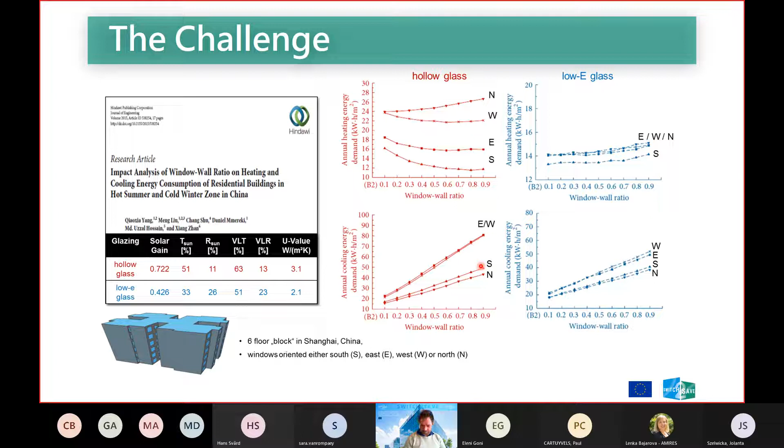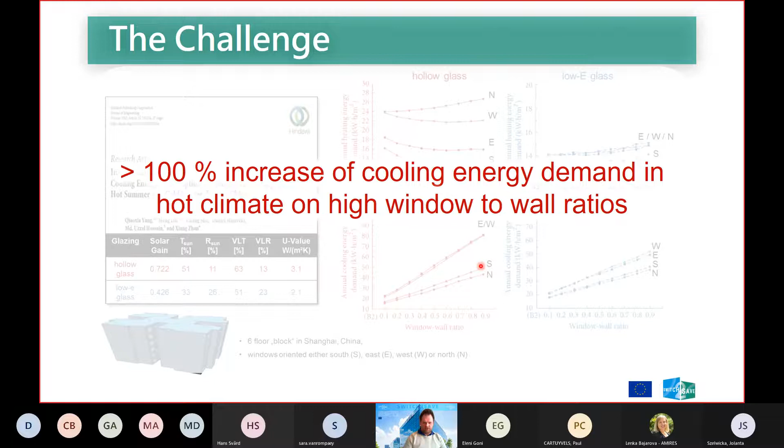The important message I want to give you for this project and from these slides is that if you have high window to wall ratios, if you have large windows with large glass facades, you will find yourself in a situation that the cooling energy demand in summer is increasing by 100% or even more. And that's even true if you use heat mirror glass, so-called low-E glass, that reflects the heat radiation. And that's something that goes also to the direction of how to deal with the climate change, not only to prevent it, but also how to deal with it. So we are addressing both aspects of this situation.

How do we want to deal with it? We want to have a switching and intelligent control of the radiation that goes through windows in a building, with two strategies for it. The first strategy is electrochromic cells. How do electrochromic cells work? You can apply a voltage just by an electrical switch. You apply a small voltage, and this small voltage will result in a change of the color of the window. In particular, it will reduce the transmission from a bleached state, here 78% transmission of visible light, to a much lower level. The window turns dark to some degree.

And then we combine these electrochromic cells with thermochromic systems. And thermochromic systems work in a different way. They switch their transmission spectrum, or how much light they let through the window, by temperature. So as soon as the surface of a window reaches a certain temperature, 60, 50 degrees Celsius, then you will find out that it turns into a reflective state, and the transmission of the infrared radiation, so the heat radiation, is significantly reduced by a factor of 2 or more.

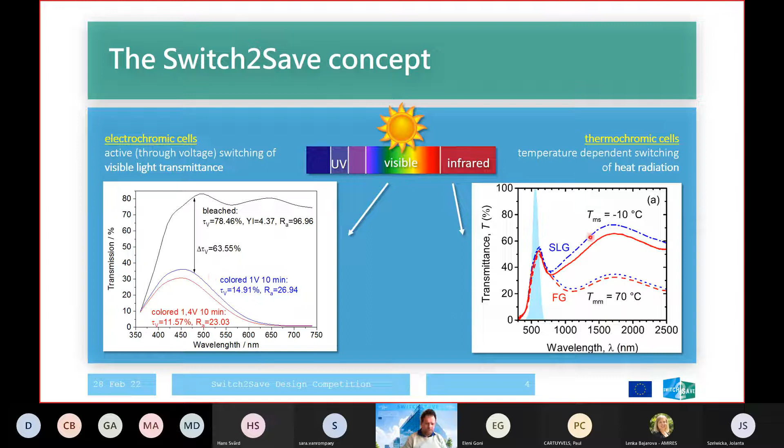So that is the idea. We combine a switching of the visible light transmittance with a switching of the infrared transmission. And what does it look like? For the electrochromic shading, we will see a little more about this in detail when we describe the technical solution. But let's give you an introduction or an idea of how it works.

You will see that the window is slowly, gradually turning dark. You will still be able to look through the window. So it is not completely black. It's not a privacy screen. You will still be able to look through it, and you will have about 10% visible light transmittance left. And that's just an illustration.

What does it look like in practice? Here you see on the left side an electrochromic window that has been made in the Switch2Save project. So it's an insulating glass unit with 1.2 times 3.6 meters. So really for large windows and for large glass facades.

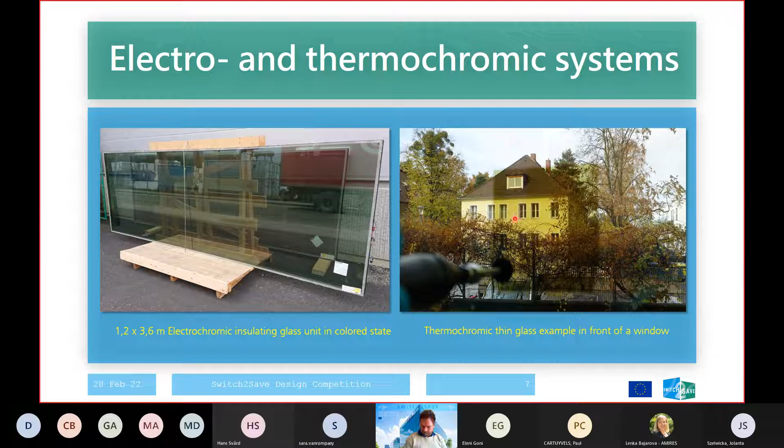And on the right side, you see an example where we just mount a thermochromic thin glass example on an existing window. The big difference is that for the thermochromic, you will not see with your eye the difference between the infrared reflective state and the infrared transmissive state, because all switching is happening in the infrared wavelength range, really controlling the heat radiation.

So what is the idea, or how do we integrate this into windows and into buildings in the Switch2Save project? We practically apply these systems on a plastic film for the electrochromic and on a rollable thin glass for the thermochromic. And that is something that will be laminated onto a glass pane. And this glass pane will form the outer pane of an insulating glass unit.

And these insulating glass units, they are universal. You can use them for glass facades. You can use them for transparent roofs even. You can use them for smart windows. So practically, the idea is that we can replace existing windows by smart windows just by replacing the window and using the new energy smart solution, I would say smart window here.

And what we also do in the Switch2Save project is we have two real live operational building demonstrators. This is an office building operated by Vasakronan in Uppsala, Sweden, and this is the second largest hospital of Greece, the General Hospital of Nikaia, which is located in Athens. So we have really two different climate conditions here. We have a northern climate, and we have the hot Southern Europe climate, and we want to demonstrate here.

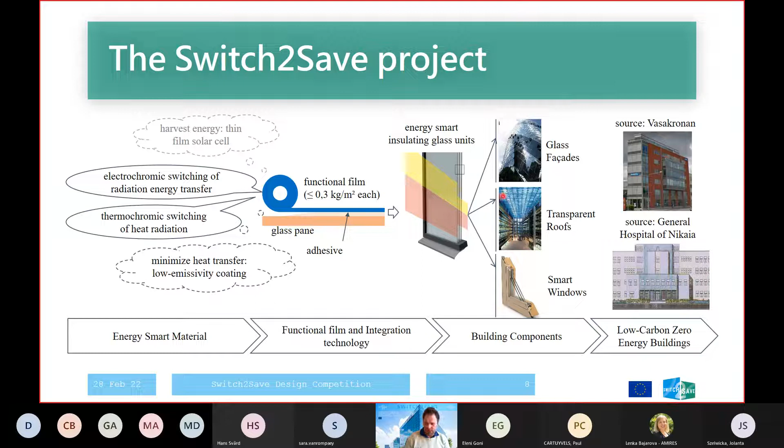And the overall strategy in the end to really come to a good energy saving is to implement intelligent switching protocols. So it is, for example, taking the weather conditions on the outside, the climate conditions, the temperature, the overall light conditions on the inside as the base for an automatic switching of the electrochromic window or the thermochromic and electrochromic combination in a roof.

So that means in winter, you will probably like to have the heat radiation from the sun going in. So then you will practically have a transmissive state. This is what you want. In summer, during the day, you want to have the heat radiation reflected. And the second story is that in winter at night, for example, you want to practically block the heat inside the room from being transmitted to the outside. And that is really the idea here, that we go where we want to save energy.

And in summer, really, thermochromic roofs can also help, because if you have no electrical contact there, no possibility to bring electricity or whatever, you can have a thermochromic roof that blocks the infrared, the heat radiation, at a certain temperature of the surface. That's the idea.

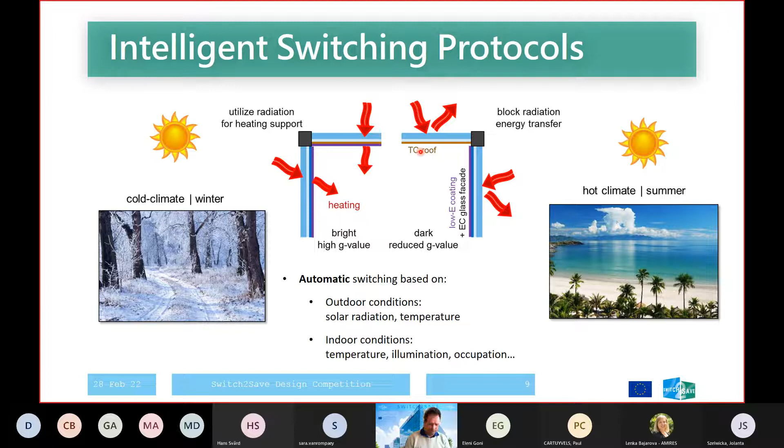And how does it serve the energy saving of the building? We have done modelings. So this is really calculations. It's not yet measured in life. This is something we do in the third and fourth year of the project. But from modeling, we learned that with a configuration that combines electrochromic and thermochromic, even the electrochromic alone helps already a lot.

And if we combine this in a building with large windows, we had an example of an office building in Athens, we can reduce the primary energy demand by more than 60%. And practically it goes mainly towards the energy demand for the cooling. So we can reduce by a factor of 2 the energy demand for the cooling, or even more. And we can even reduce the energy demand for lighting in a building in Athens.

And how does this work? Usually, if people feel uncomfortable in the building, they use the external window blind. They practically turn off the light from outside, and they switch on artificial light that they have in their offices. And that's something that we can definitely reduce, because the electrochromic windows are still transparent to a certain degree, and you can switch them to an intermediate state. So that's absolutely perfect for the illumination in the building.

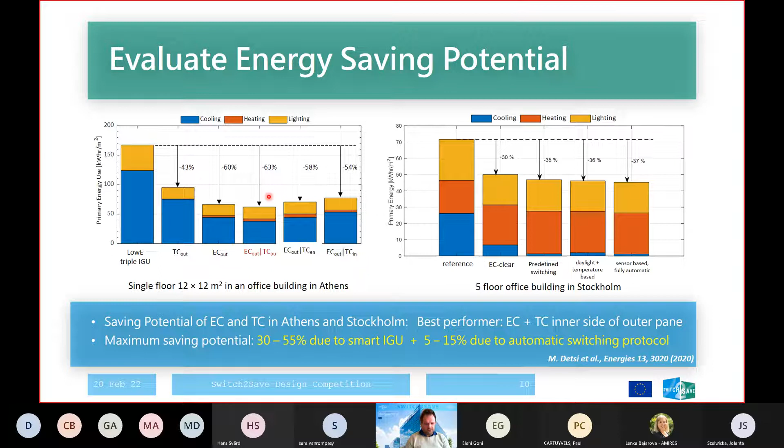That's two things that definitely we want to see with you, the architects, the upcoming architects, whether you can probably even top these numbers. Or at least show us, or show yourself, how to use the technology to maximize the impact and to create building designs that have not been possible before, just because the energy balance of these glass buildings, glass palaces, is too difficult to achieve. And I'm curious to see what design we will be able to do with this new technology.

And based on that, I want to thank you very much for your attention, just to show you all the partners in Switch2Save: the university bringing us the technology for the thermochromic, Fraunhofer Institutes with pilot production facilities and technology development, ChromoGenics for the electrochromic technology, a facade glass maker for glass facades. AMIRES is here for the project management and the public relations activities. E2ARC architects, a perfect person to ask if you have a question about the contest, and the building owners. NTUA, the National Technical University of Athens, who do all the calculations, the building simulations and the testing.

And finally, Vasakronan, office building owner in Sweden, and the hospital in Greece, Nikaia Hospital, where we will go into the children's station and into intensive care units. So really, we are speaking about a technology that you can use in a sensitive environment. Thank you very much, and I hope I was not too long.

No, you are perfect in time, John. Thank you very much for introducing the Switch2Save project in such a clear way, and for illustrating electrochromic glazing and the intelligent switching protocols.

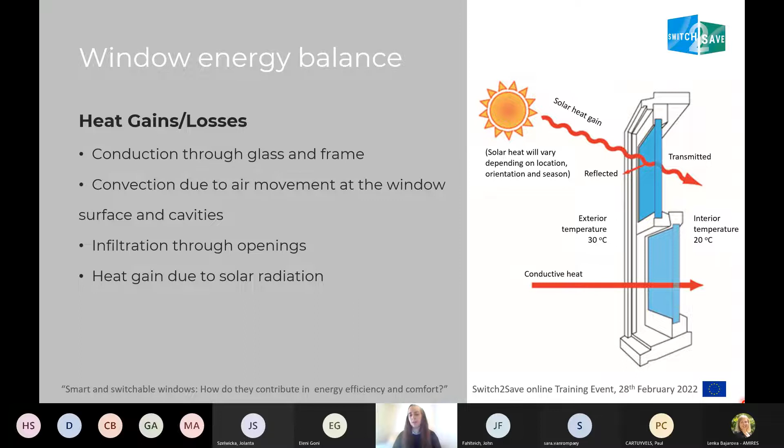And finally, as we all know, windows are a source of heat gain for the space due to solar radiation, which can vary depending on the location of the building, the orientation, and the season. An important metric for window systems is the U value, which expresses the insulation ability of a window system. The U value is defined as the rate of heat transfer divided by the temperature difference, and therefore a lower U value corresponds to lower heat transfer and higher insulation.

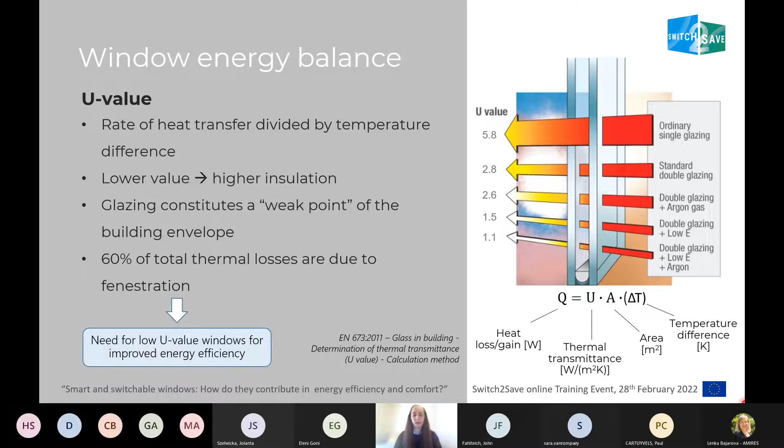The U value is highly dependent on the configuration of the window system. So for example, for an ordinary single glazing, the U value is quite high at approximately 5.8, while for a double glazing that has low-E coating and argon filling, the U value is much lower at approximately 1.1. Despite their various benefits, windows tend to be a weak point of the building envelope, as they are responsible for approximately 60% of the total thermal loss. And therefore, there is a need for windows that have lower U values to improve energy efficiency.

Another important metric is the solar factor, or the G value, which is defined as the sum of the direct solar transmittance through the window, as well as the secondary heat transfer, which is the heat that is absorbed by the window and then re-emitted towards the interior. The G value is essentially the percentage of the incident solar heat gain on the window that is then converted to heat gain in the interior space. So for a colder climate or during the winter months, a higher G value is desirable to reduce the building's heating needs, while for a warmer climate or during the summer months, a lower G value is preferable to reduce the building's needs in cooling.

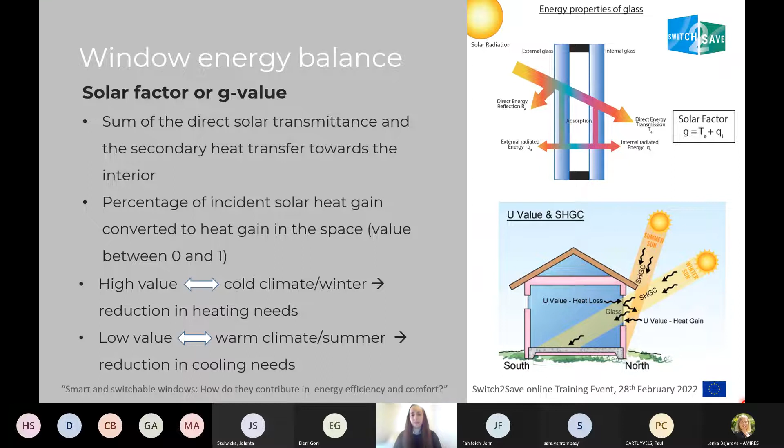The visible light transmittance is also an important metric. It expresses the percentage of visible light that is transmitted through the window. And obviously, it is important to have a high value for the visible light transmittance to ensure visual comfort for the occupants of the building and to also reduce the building's needs for artificial lighting.

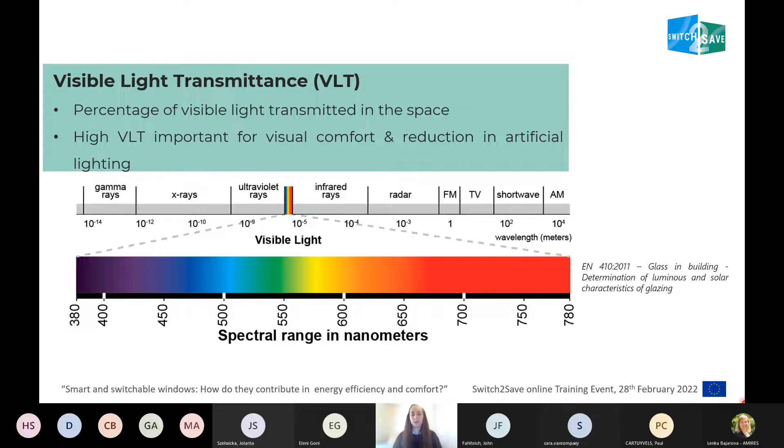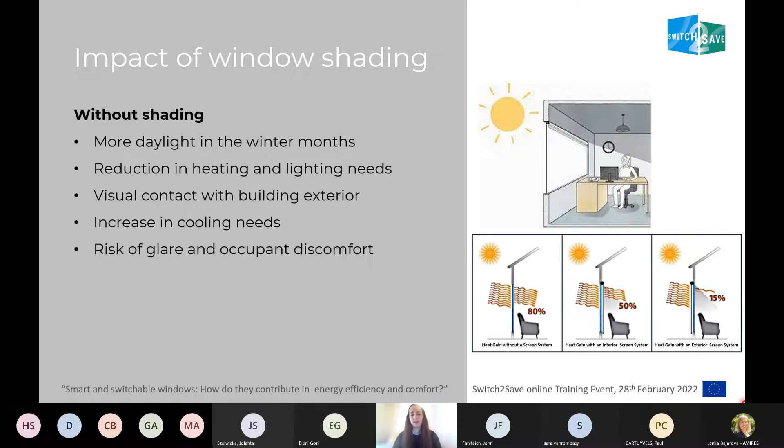Now, regarding the impact of shading. In the absence of shading, windows allow more daylight to enter the space. This is desirable especially during the winter months to reduce the building's needs for heating and lighting. And at the same time, it increases occupant comfort since they are allowed to have visual contact with the environment of the building. However, overheating of the space can occur during the summer months, which leads to an increase in cooling needs, and there is also a risk of glare that causes discomfort.

Interior or exterior shading systems are able to protect the space from overheating due to solar radiation, improving the building's energy efficiency in terms of cooling. And shading also offers protection from glare and UV radiation, and it enhances privacy. However, a shading system might obstruct the occupants' view to the outside, which might create a feeling of being closed in to the occupants.

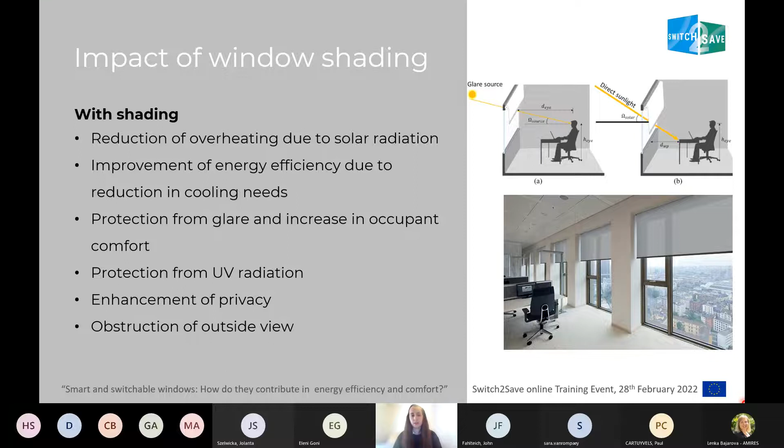Regarding the total fenestration area and dimensions, an important metric is the window-to-wall ratio, which is defined as the ratio of the total window area divided by the exterior wall area of the building, taking into account all the exterior walls. And in this picture here, you can see the same building depicted for 3 different window-to-wall ratios, ranging from 25 to 50 and 75%.

Another important aspect for windows is the ratio of height to width. Here, a higher value, which means that the height of the window is greater than the width, allows greater solar penetration in the space, but limits view to the outside, while a lower value, where the width of the window is greater than its height, allows a more uniform illumination of the space.

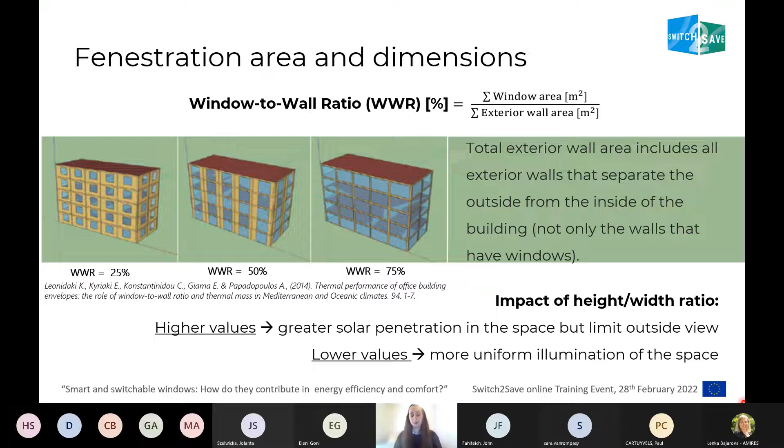Apart from energy efficiency, another important factor is comfort. And to better understand the impact of windows, it is important to find a way to quantify comfort, which is divided into thermal and visual comfort.

Thermal comfort is defined as a state of mind in which a person is satisfied with the thermal environment and desires no further change. This can be affected by many parameters, such as the air temperature and the airspeed, the humidity of the space, and the clothing and the metabolic rate of the occupants, as well as the radiant temperature.

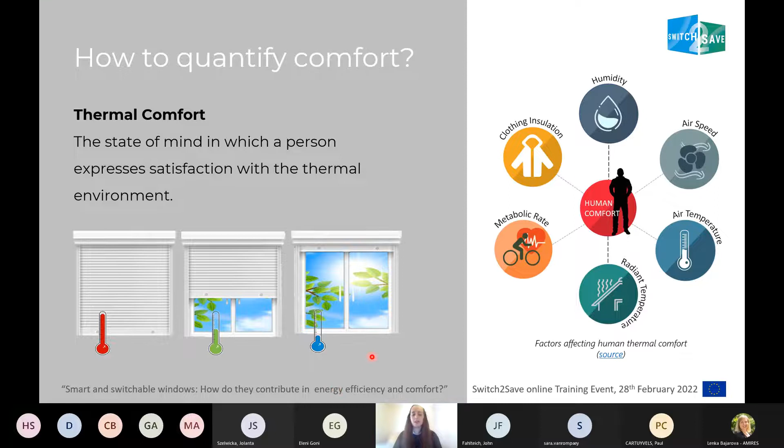And window operation is also greatly affected by occupant comfort. For example, during the summer, the occupants might use shading systems to keep their space cooler, while during the winter, they will tend to leave the windows unshaded to increase heat gain in the space.

A popular model to quantify thermal comfort was introduced by Fanger and is based on the heat balance of the human body. This model can be used to calculate two important indices, the first being the predicted mean vote, which is the prediction of the mean vote of a large group of persons on a 7-point sensational scale that ranges from -3 to 3. -3 refers to a space that is too cold, while 3 refers to a space that is too hot, and 0 refers to a neutral thermal sensation.

The PMV index can be used to calculate another index that is called the predicted percentage dissatisfied, or PPD, which is pretty much the predicted percentage of people in the space that are going to be dissatisfied with the thermal environment. And in this figure here, we can see the correlation between the PMV and the PPD indices. And it is interesting to note that even for a neutral thermal sensation with a PMV value of 0, there is still always 5% of people that are thermally dissatisfied.

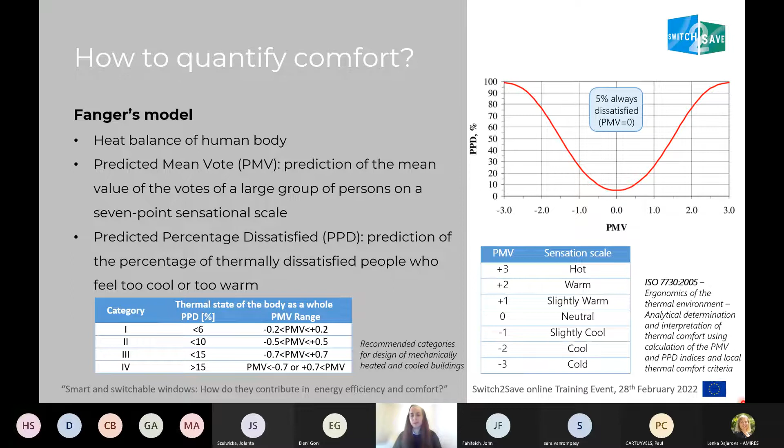Another aspect of comfort is visual comfort, which refers to whether there is an adequate level and quality of illumination for visual tasks in the space. The international standards usually set specific requirements according to the space use. And for building design, an important aspect is daylight harvesting. Daylight harvesting decreases the demand for artificial lighting and is especially useful in buildings that are mainly used during the daytime, such as non-residential buildings.

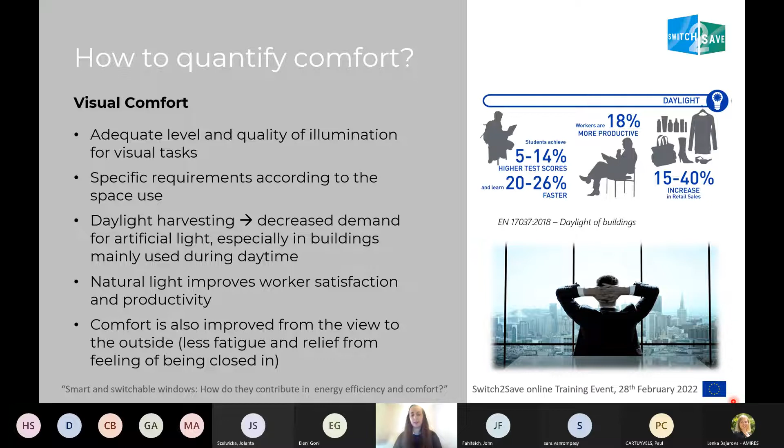It has been proven that natural light is much more preferable compared to artificial light, since it improves worker satisfaction and productivity. And also, occupant comfort is improved by allowing the occupants to have a view to the outside, which reduces their fatigue and relieves them from feeling like they are being closed in.

Visual comfort also includes the avoidance of glare, which is a negative sensation that can be caused by bright areas that have a sufficiently greater luminance than the luminance to which the eyes are adapted. It can be caused by direct sunlight through a window, as you can see in the figure here, or generally by the luminance difference between a bright area and the darker task area.

Glare can result in annoyance, discomfort, or loss in visual performance and visibility, and it can be quantified by a number of different indices, such as the daylight glare index. This index is calculated according to the luminance of the glare source, which in this case is the window, the background illuminance, which is the illuminance of the area surrounding the window, as well as the relative position and orientation of the occupants of the space compared to the position of the windows.

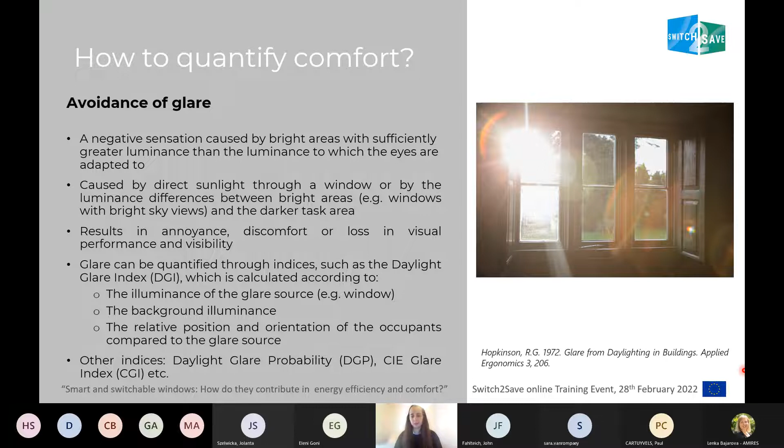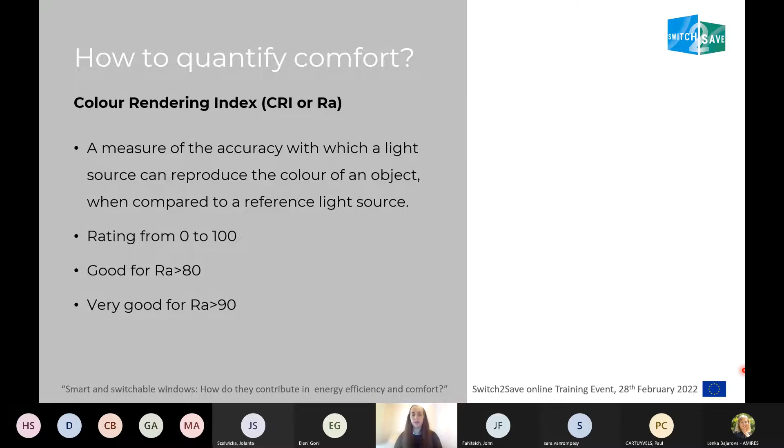Visual comfort is also affected by the color rendering index, which is a measure of the accuracy with which a light source can reproduce the color of an object when compared to a reference light source. For example, a colored window will affect the perception of the color of the objects that are on the outside. In this case, a window that has a blue tint will make the objects behind the window appear bluer than what they actually are. For windows, a color rendering of 80 or higher is considered good, and a value of 90 or higher is considered ideal.

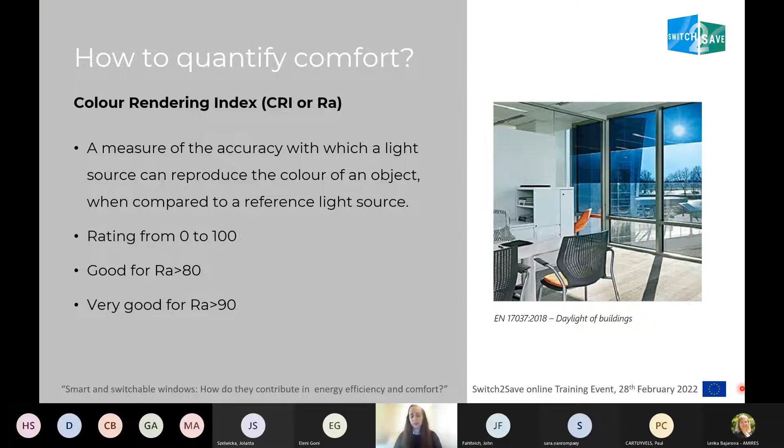There are many tools that we use to calculate energy efficiency and comfort. For example, EnergyPlus is a free-of-cost software that can be used for whole building energy simulation. It has many capabilities such as combined heat and mass transfer modeling, and illuminance and glare calculations, and can also include an interface for co-simulation with other software.

Another useful tool is WINDOW, which includes an international glazing database of commercial glazing, as well as complex glazing and shading devices. And this software can be used to create and then import glazing systems into other software or to calculate their thermal and optical properties.

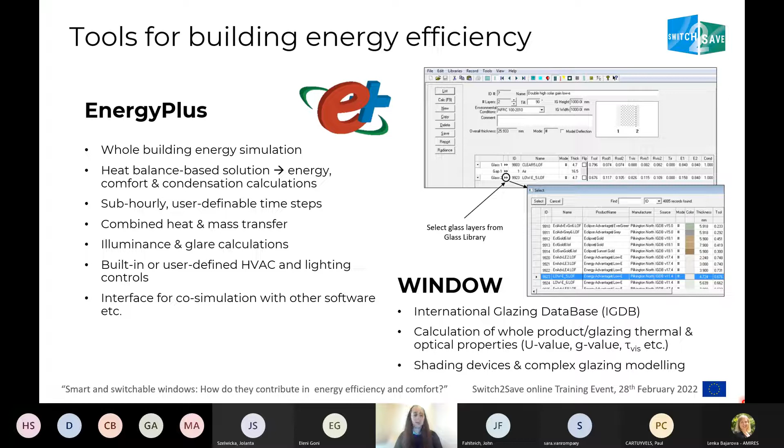For example, for a whole building energy simulation, the appropriate window systems can be first created in WINDOW and then imported into EnergyPlus for a whole year energy simulation. And this way, we are able to calculate the building's energy needs as well as the appropriate comfort indices, and we're able to improve and eventually optimize energy efficiency as well as comfort. And this is the end of the first part of my presentation.

Thank you, Michaela. This was very clear to understand how this switchable glazing works and what the effects are. Now I would like to invite Alexander with his presentation. I introduced him shortly as an expert in electrochromic systems in Chromogenics, partner of the project. He is an experienced consultant with a demonstrated history of working in the building materials industry, skilled in electrochromics and other switchable glass technologies, as we are developing in the Switch2Save project. I give you the floor, Alexander.

Good morning and hello. My name is Alexander Kraft. I'm a member of the Chromogenics R&D team and the work package leader at the Switch2Save project. I will talk a little bit about dynamic sun protection glass.

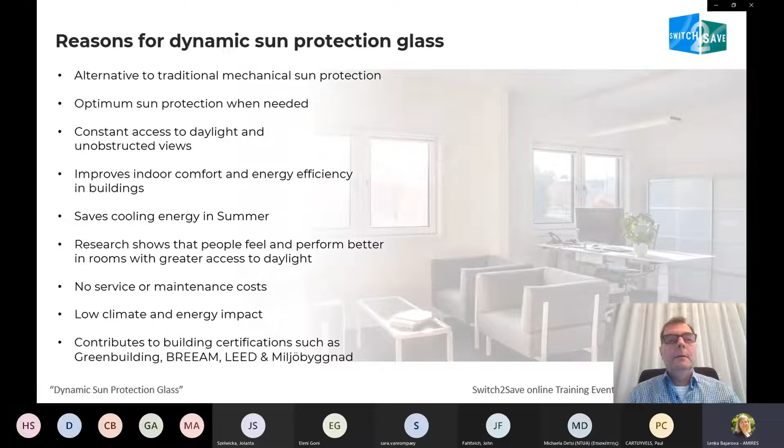What are the reasons for using dynamic sun protection glass? This is an alternative to traditional mechanical sun protection solutions. You have optimum sun protection when needed. You have constant access to daylight and an unobstructed view from the inside of the building to the outside. It improves indoor comfort and energy efficiency in buildings and saves cooling energy in summer.

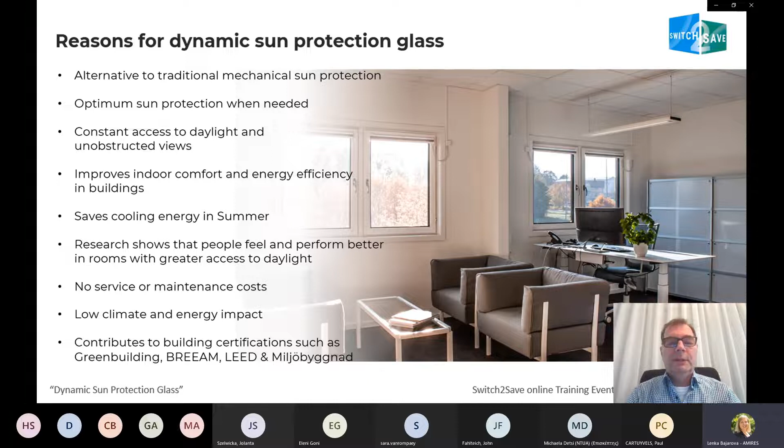Research shows that people feel and perform better in rooms with greater access to daylight. You have no service or maintenance cost compared to external shading solutions and the low climate and energy impact. The use of dynamic sun protection glass also contributes to building certifications such as Green Building, BREEAM, LEED, and the Swedish Miljöbyggnad.

What technologies can be used for dynamic sun protection glass? We have two fields of solutions, the active field and the passive field. Starting with the active technologies, the dynamic light transmittance can directly be influenced by the user. Technologies which are among the active technologies are electrochromic, liquid crystal technologies, and so-called suspended particle technologies. We at Chromogenics and in the Switch2Save project focus on electrochromic technology.

Here, a switching of the light transmittance can be done by applying low DC voltages in the range of 1 to 3 volts. It is a slow switching, which takes several minutes. Energy is only necessary for switching, and each intermediate state between the maximum and minimum light transmittance can be adjusted.

Contrary to this, liquid crystal technologies and suspended particle technologies are switched by the application of higher voltages. These are AC voltages between around 60 to 110 volts. It is a fast switching in seconds, but energy is necessary to maintain one of the transmittance states. Usually you have only two states, on and off, and without a voltage you have either the milky or a dark state, and with voltage you have a clear state or the state with a high visible light transmittance.

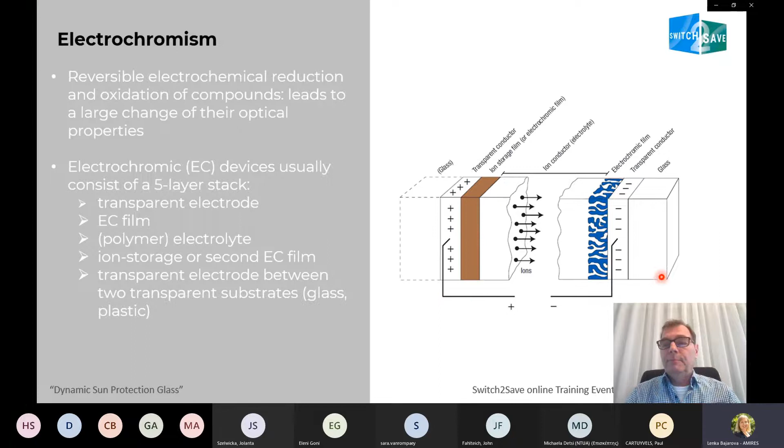To make this usable in practice in a window, usually a 5-layer stack is constructed. This is a transparent electrode, a first electrochromic film, a polymer electrolyte, a second electrochromic film or ion storage film, and a second transparent electrode. The low DC voltage is applied between the transparent electrodes, and this 5-layer stack is packed between 2 transparent substrates, mostly glass, but transparent polymers can also be used.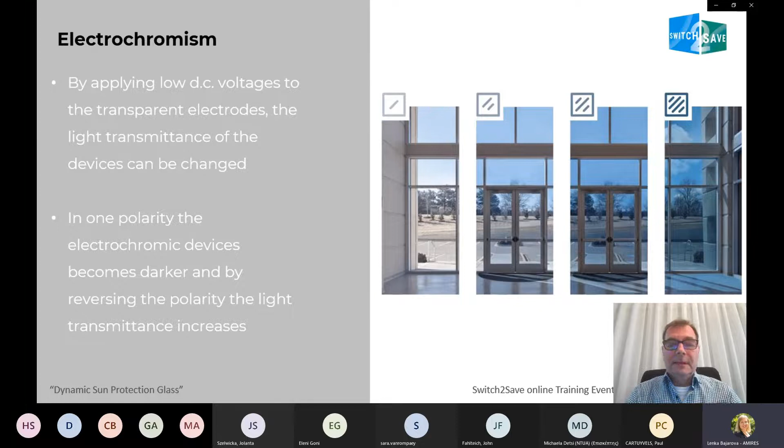Shortly, a few words about the company Chromogenics. We are a Swedish company. The company was founded in Uppsala in 2003. We are proud of our innovation leadership for 20 years. The research we bring to real products on the market is from the Ångström Laboratory of Uppsala University. We focus on smart glass, solar control, and electrochromic material. And our company is listed on the Nasdaq First North Growth Market in Stockholm.

Chromogenics' product is called ConverLight. It is a lightweight electrochromic foil. So the 5-layer stack is placed between 2 thin polyester films, each about 100 micrometers thick. And this is very advantageous because this can be produced in a roll-to-roll technology with very low cost and high-speed manufacturing. In addition, such a lightweight, thin electrochromic foil can be transported anywhere in the world at low cost because you do not have to transport heavy glass.

In the end, this foil has to be laminated between 2 glass panes to make it durable, and the end product is a laminated glass or an insulating glass unit with 2, 3, or 4 glass panes and this laminated glass. An electronic control unit automatically regulates the tone of the film and the solar transmission, for example, by connecting to a sensor network. Also, a fully self-sustaining dynamic glass powered by solar cells, which are integrated in the window frame, is possible and is a product of Chromogenics.

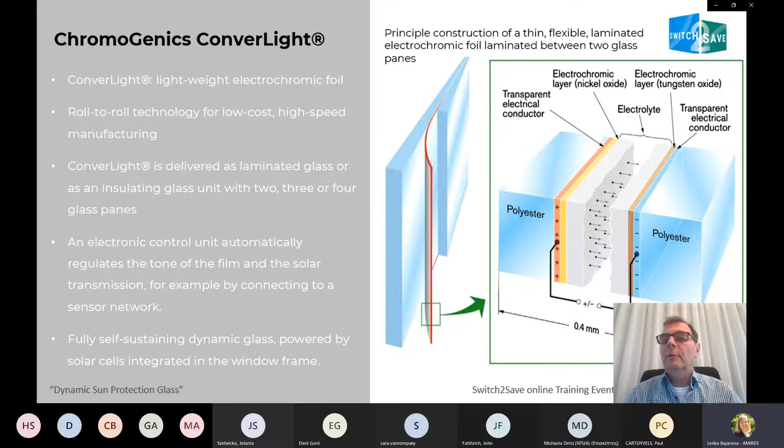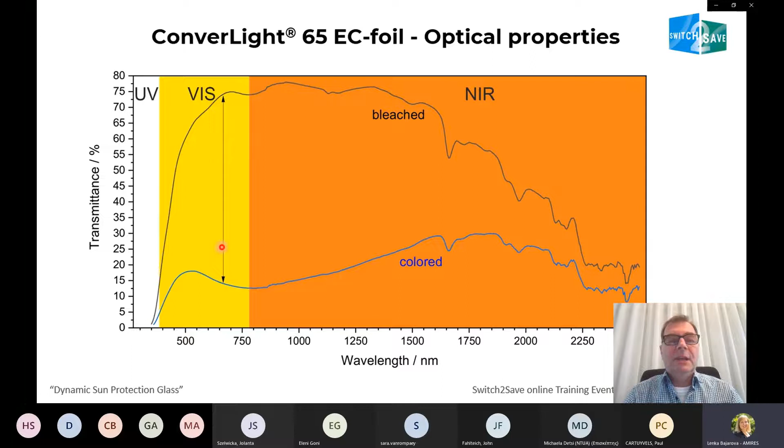Here you see the optical properties of the ConverLight 65 EC foil. This is the transmittance versus wavelength. The white part here is the UV light, ultraviolet. The yellow is the visible light, so this is what we can see. And the near infrared, the orange part, is the heat radiation. We have a high light transmittance in the bleached state and a much lower light transmittance in the colored state, and we can adjust all light transmittances in between.

In the next slide, you see a few data of this product as a single glazed, double glazed, or triple glazed product. You can see that the light transmittance changes between 66 and 17% if a single glazed product is used. In a modern triple glazing IGU, the light transmittance can be changed between 54 and 14%. We have a very good color rendering index. And of course, the U value goes massively down if you use double or even triple pane windows.

Here are the colors. The color in transmission in the clear state is slightly yellowish brownish. The color in the dark state is neutral gray. And the colors in reflection, in the clear state and in the dark state, are also more brownish. This is one of the disadvantages of the current state of the art of Chromogenics glass, because this yellow brownish color is not very favorable. Many customers do not like this color.

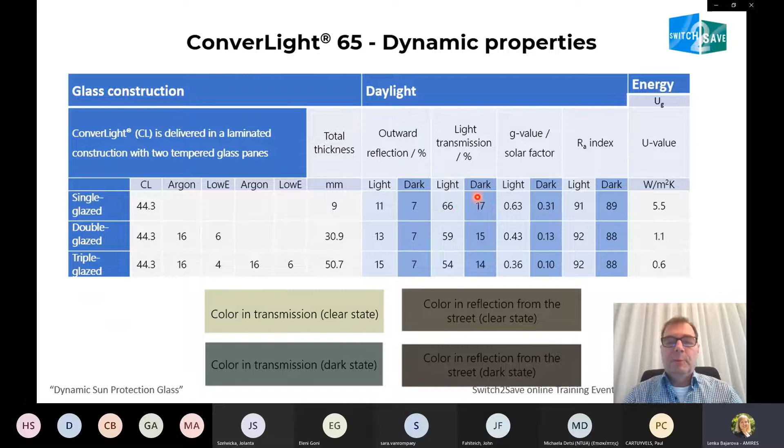So one task of the Switch2Save project is to get rid of this yellow brownish color. In addition, we want to have a higher light transmittance in the bleached state, more than 75%, and a lower light transmittance in the dark state, less than 10%. This would massively improve the properties, the performance of the glass, and also the user acceptance.

These are two examples of our glass. This is the single glass. On the left side, you see the bleaching of the glass. And on the right side, you will see the coloring of the glass. This is faster than in reality. As I already said, it takes a few minutes, and here it only takes a few seconds. But of course, in such a presentation, we cannot wait minutes for the glass to change light transmittance. Yeah, these are real objects.

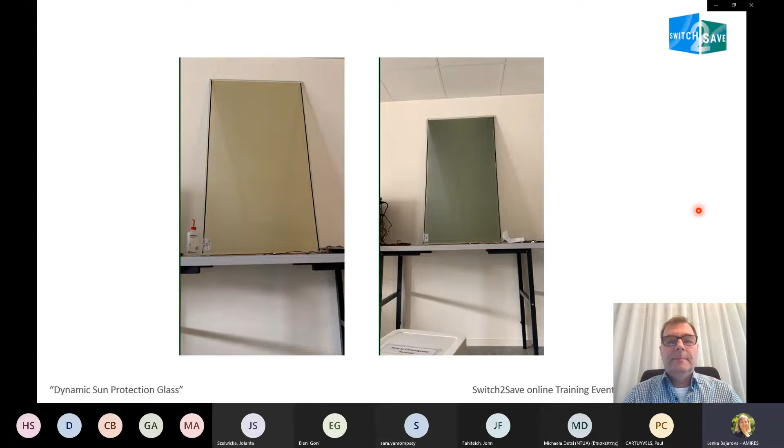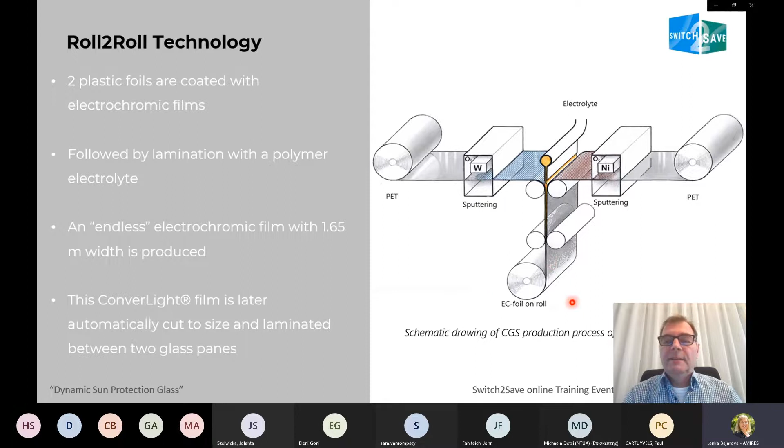And here, shortly, a few words on the production process. As I already said, we have a roll-to-roll technology. Two plastic foils are coated with electrochromic films, tungsten oxide and nickel oxide, and then laminated together with a polymer electrolyte, and then you have the EC foil on rolls. The end product is the ConverLight dynamic electrochromic IGU with 2 to 4 glass panes.

We have a freedom of design, so not only rectangular shapes are possible, but also circular or any shape, triangular, curved. Maximum dimensions which can be produced at the moment are 1.5 meters times 4.4 meters. Maybe even 5 meters is possible here. And everything is automatically controlled via a control system.

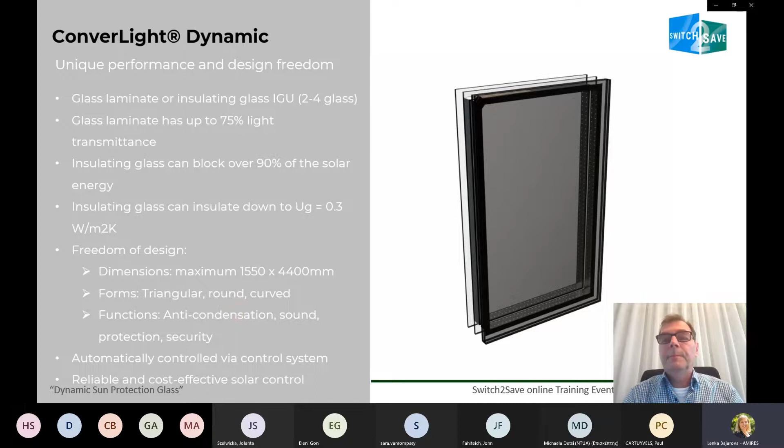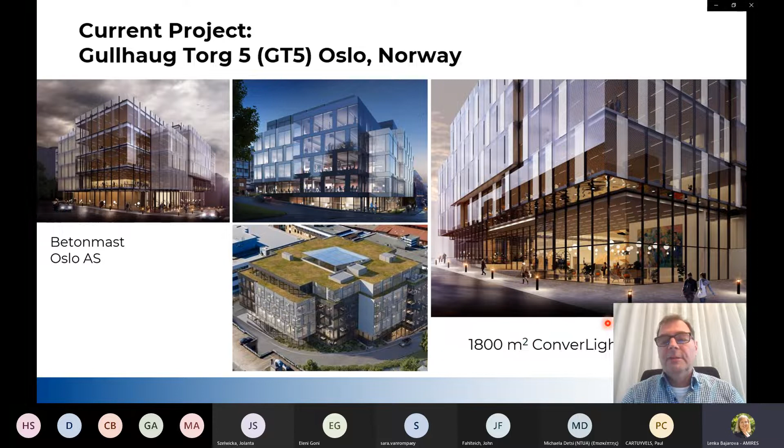This is the roof of a school in Göteborg in Sweden, 520 square meters of ConverLight glass. And this is the project we are equipping at the moment with the electrochromic glass. It's the GT5 project in Oslo in Norway. So here everything will be equipped with electrochromic glass, still with the brownish colored glass. This is the largest project we had so far. It's 1,800 square meters of ConverLight dynamic sun protection glass.

Only a few words on switching protocols for the electrochromic films which are possible. One possibility is, of course, manual control according to the user. So each user in his office room or in his apartment can manually switch the device as he wants. We can have a predefined control according to a specific schedule. Maybe in the night, in the early morning, and in the evening, we have clear glass, and over the day, we have dark glass.

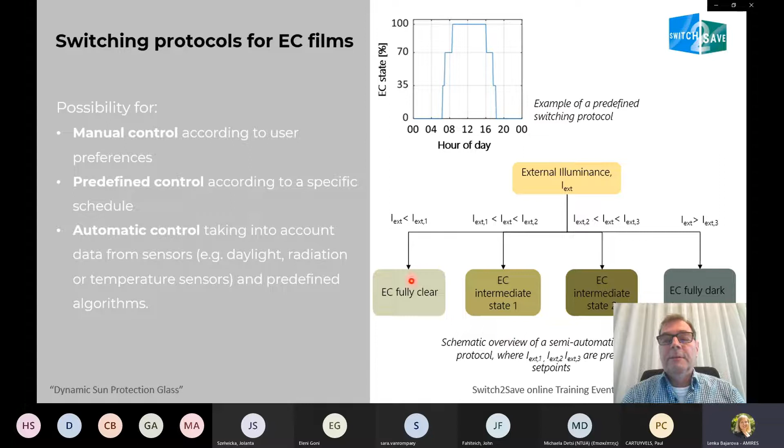And the most advanced is automatic control, taking into account data from sensors, daylight sensors, light intensity sensors, radiation or temperature sensors, and using a predefined algorithm to change the light transmittance of the glass. Here you can see, with what I already said, that different states are possible. This was my part for the Switch2Save project, and I want to thank you.

Thank you, Alexander, for the very interesting introduction to electrochromic glazing, the glazing that you are producing with your company Chromogenics, partner in the project. Also, the examples were very interesting, and important for us architects is to see and to know and to understand how it looks, this glazing that changes color. Because for the design projects, that is also very important.

Now we come to the moment of launching the architectural design competition. I did not yet introduce myself. My name is Sarah van Rompaey. I'm an architect. Sarah, excuse me. There is a presentation left from NTUA, the second part. Oh, sorry, yes. So it's Michaela again then. Yes. And this part is much shorter than the previous one.

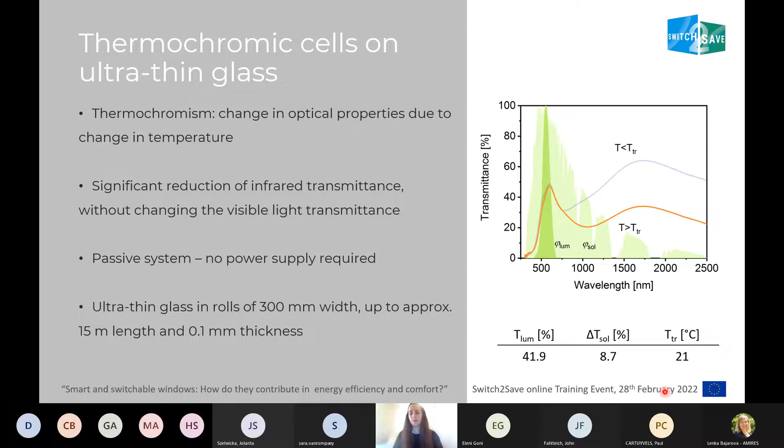In this figure you can see the transmittance of a thermochromic sample that has been developed for various wavelengths, for temperatures under the transition temperature, which in this case is 21 degrees, and for temperatures higher than the transition temperature. This darker green area corresponds to the visible spectrum, the light that we can see. So switching of the thermochromic layer leads to a significant reduction in the infrared transmittance, while the transmittance in the visible spectrum is not affected. Here you can also see some characteristic optical properties of the developed thermochromic samples.

In this figure, again, you can see how the exterior environment can be seen through a thermochromic sample compared to a normal window. And here you can see a visual representation of the color of the thermochromic samples in transmission, as seen from the interior of the building, and in reflection, as seen from the outside of the building. It should be noted that because the change in the sample's properties in the visible spectrum is not significant when it is switched from the cold to the higher temperature state, these colors also don't change significantly.

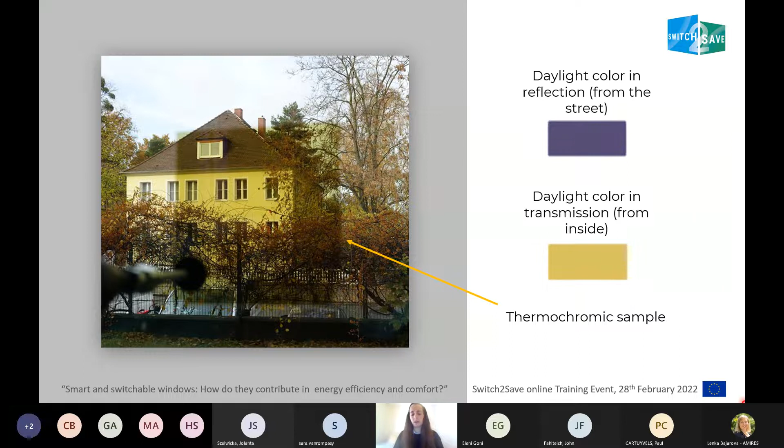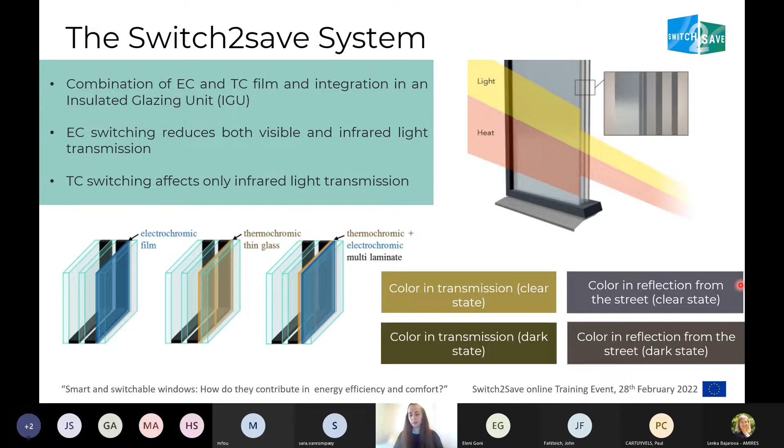The aim of the Switch2Save project is to combine in the same insulated glazing unit both an electrochromic and a thermochromic film. In this configuration, the electrochromic film will be responsible for reducing the transmittance in both the infrared and the visible spectrum, while the thermochromic film will only further reduce the infrared heat transfer. Here you can see a visual representation of the system that we aim to create, and a representation of the color of a combined electrochromic and thermochromic system. Here is the color as seen from the building interior for the clear state of both films and for the dark state of both films. And here is the color as seen from the outside, again for the clear state and for the dark state.

Now, two indicative case studies that were conducted in the frame of the Switch2Save project will be shortly presented. The first one refers to the neonatal intensive care unit of the General Hospital of Nikaia in Athens. Here you can see the building model that we created for the clinic. And in this study, we examined various control strategies for the electrochromic film of a combined electrochromic and thermochromic system.

And we calculated the energy needs of the clinic for heating, cooling, and lighting for the different control strategies and compared them to the current state of the clinic. It has double windows with interior shades and exterior awnings. And the results showed that there can be a reduction of approximately 11% in primary energy use using the Switch2Save insulated glazing units. And there can also be an additional reduction up to 1.8% when implementing optimized switching protocols.

At the same time, the visual comfort for the people in the clinic is significantly improved since more daylight is allowed in the space, and the people are now able to have a view to the outside, which was previously obstructed by both the interior shades and the exterior awnings.

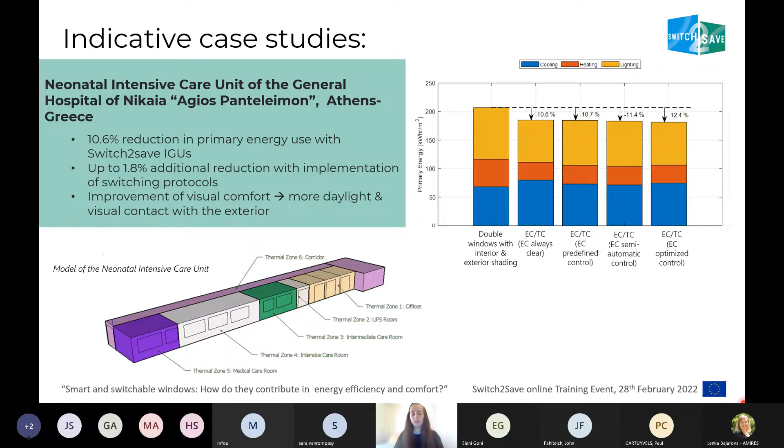And the second and final case study refers to the Business College of Athens in Greece. This is an office and educational building that has a fully glazed south facade that is shaded by exterior overhangs as well as interior shades. And the study showed that replacing the current double windows with triple electrochromic windows leads to a significant reduction between 21 and 23% in primary energy use, depending on the control strategy. And at the same time, visual comfort is also improved.

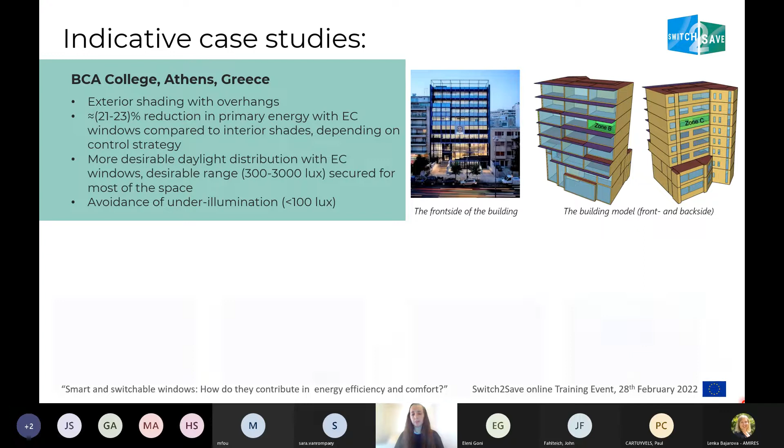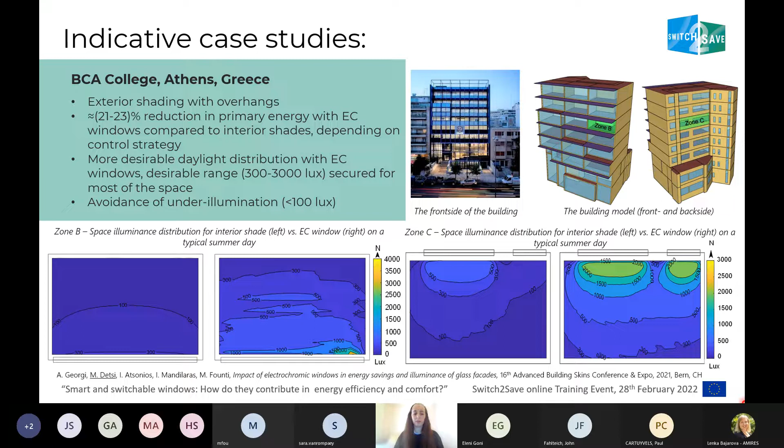And here we can see that the electrochromic windows allow a much more desirable daylight distribution in the space, securing illuminances in the desirable range between 300 and 3000 lux for most of the space, and underillumination that was present in the case of the interior shades is also avoided. And finally, the occupants are again able to have a visual contact with the building's environment all the time, whereas in the case of the interior shades, this is obstructed when the shades are closed.

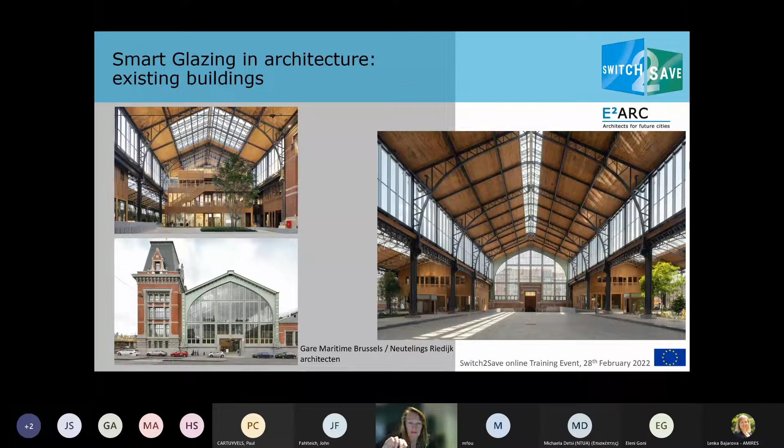Heating and cooling will be produced with geothermics, and the electricity will be produced thanks to photovoltaics. Of course, the original building had single glazing, but this renovated Gare Maritime will have triple insulating and smart dynamic glazing. And all this without touching heritage values.

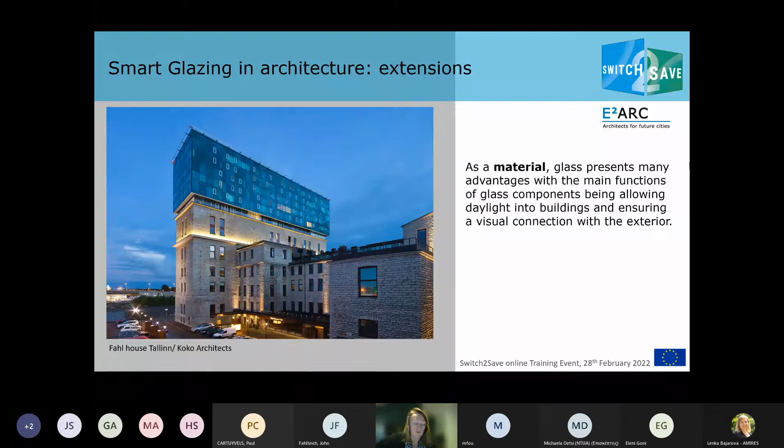Some more examples about extensions of a building completely in glass. This building in Tallinn by Koko Architects, where the main functions of glass are allowing daylight into buildings, ensuring a visual connection with the exterior. Of course, you can have the glass facade to express or to give a contrast between new and old. Another example we probably all know, Zaha Hadid in Baku, to show the clarity and the aesthetic nature of glazing. It is unmatched.

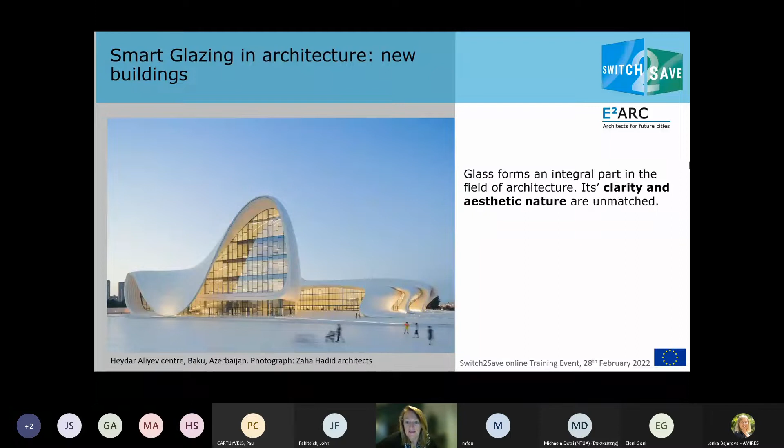This building, the Antwerp Law Court by Richard Rogers, also shows that glazing has many forms, types, and applications, roof, vertical, horizontal, to enhance the architectural value of a building.

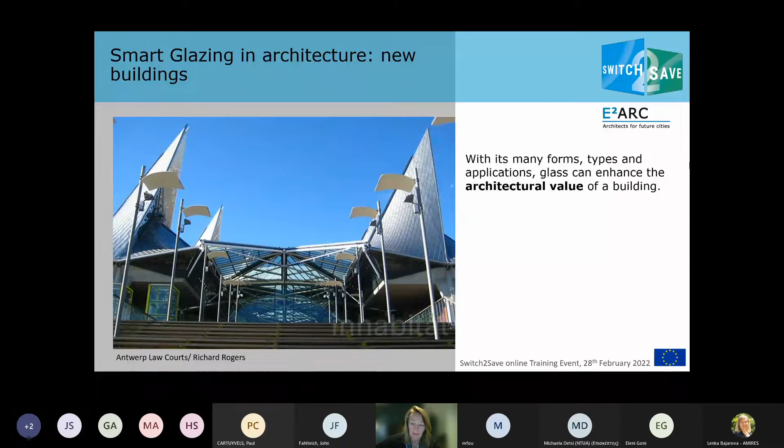This project in Milano by Bjarke Ingels from BIG Architects illustrates that the use of glass in architecture has really increased over the last few decades. It's now really a major expression. It's a design element in commercial office buildings, airport terminals, train stations, shopping centers. And this building in Milan really illustrates this.

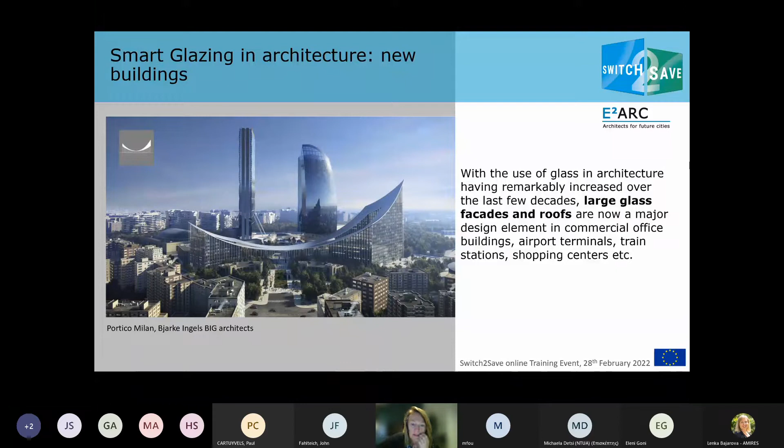So if we use glass as this expression, really, there is a key role for the glazing selection. When we use glass as such a dominant facade feature, the choice of the glass is key. Because in modern buildings, up to more than 60% of energy transfer through the building envelope is related to the glazing components. You probably know this building. This is the Hamburg Opera House by Herzog and de Meuron.

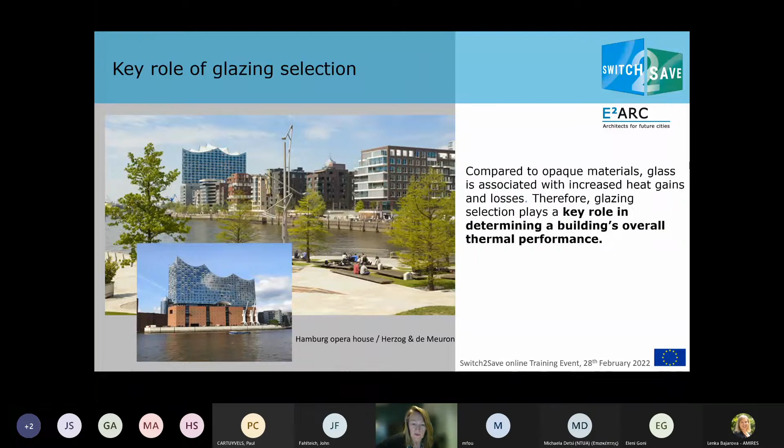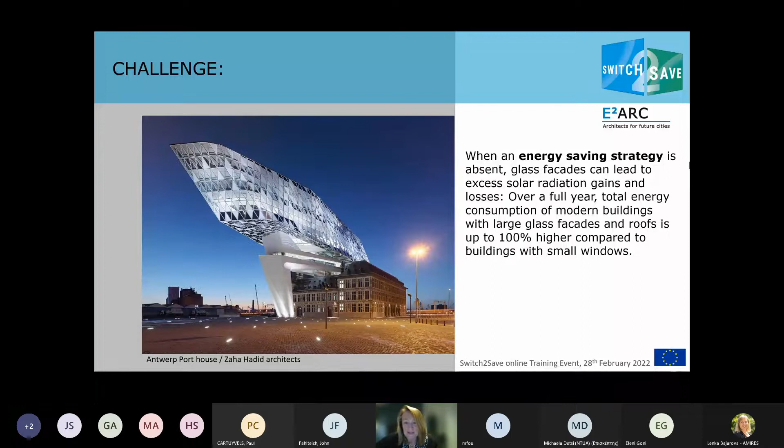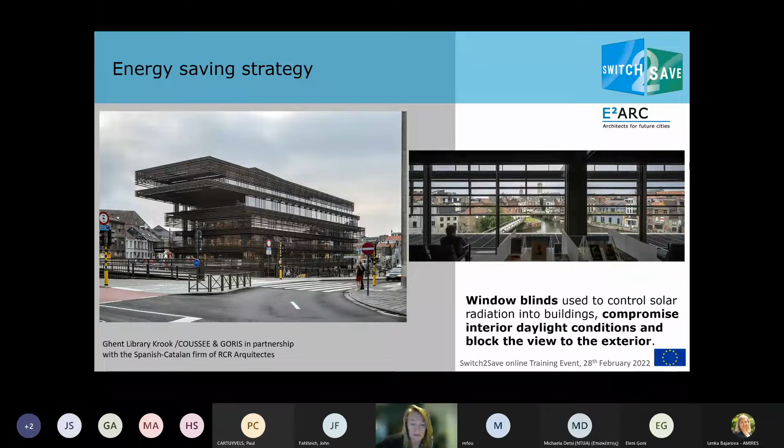Here they use this as a way of expressing, but of course, if you look from the inside, it can compromise daylight conditions, and it can also block the view to the exterior, as you see very well here in this interior view of the library in Ghent. So what is the answer to these challenges?

As we learned from previous presentations, the answer to the challenges can be high-performance glazing. This example was also in the presentation of Alexander Kraft, because this is the glass we are developing in the project. The high-performance glazing can contribute to the insulation of a building and deliver energy savings while ensuring comfort conditions without losing sight and architectural freedom.

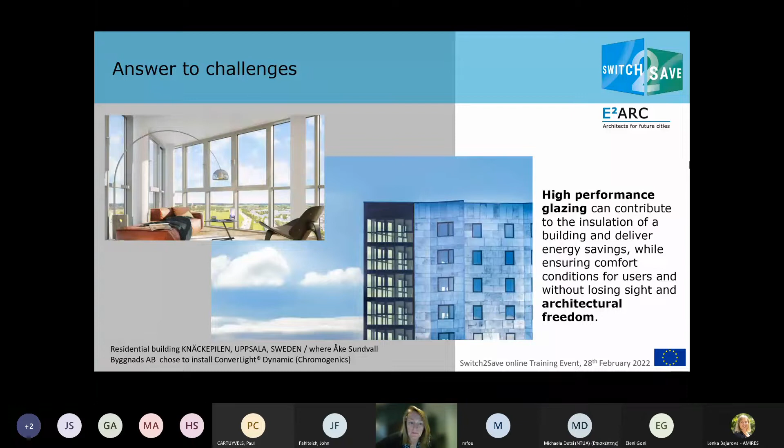Another example, why would we use this smart and switchable glazing? Because the glass has no limitations, which gives indeed more architectural freedom. The electrochromic technology in the dynamic solar control glass stops the solar heat even before it enters the building. It can block up to 90% of the heat and insulates as well as a wall. That's important, that you can have your glass parts having the same insulation grade as the wall, while still providing daylight and a good view.

It also acts as an automatic climate system where unwanted solar heat radiation decreases, which keeps the premises cool, and the use of external solar control can be avoided. As a result, as this building shows, smart and switchable glazing is very cost-effective for all buildings.

Another nice example why we could use this smart and switchable glazing, because it provides an enjoyable and healthy indoor climate that increases the well-being of people who are present in the building through daylight transmittance, ultraviolet protection, open views, comfortable temperature, and as already said, it acts as an automatic climate system where unwanted solar heat radiation decreases and the indoor comfort can be controlled.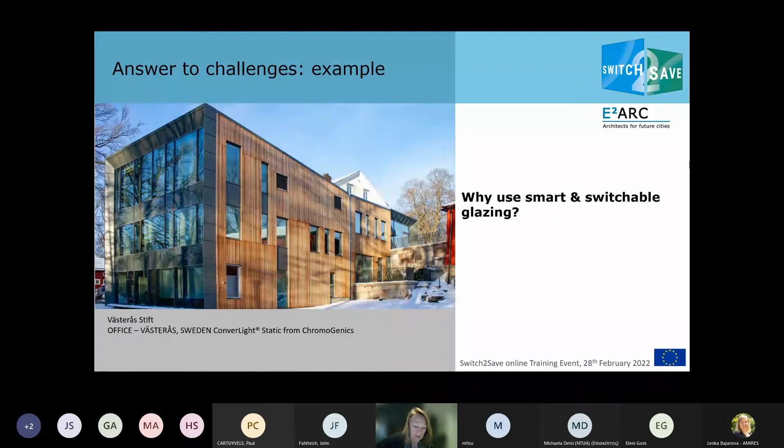And for the real estate developer Extensa, there were three benefits of this automated dimmable electrochromic solar control glazing. It's very easy to use. Just one switch, push the button. And then two, for him, the avoidance of disruptive solar control elements on the historic facade. This is also really an advantage, because for a historic building, really, it's not possible to put any elements outside.

And here also, this is integrated in a circular economy concept. This whole site, Tour and Taxis in Brussels, is a work in progress, and it's already compared now with the Hamburg HafenCity. It will be a center point of a very exciting urban development.

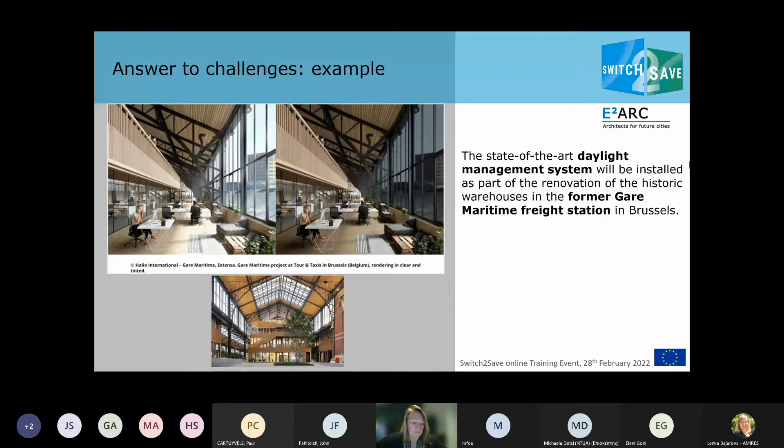Then we come to the Switch2Save opportunity, the glass we are developing in our project. This image we have already seen before, but this shows how the color from inside can go from very clear to darker and darker blue. This is the window the Switch2Save project is developing. So you see here on the detail, it's a triple glazing with an electrochromic film and a thermochromic film inside. But we have seen in the other presentations how this was produced.

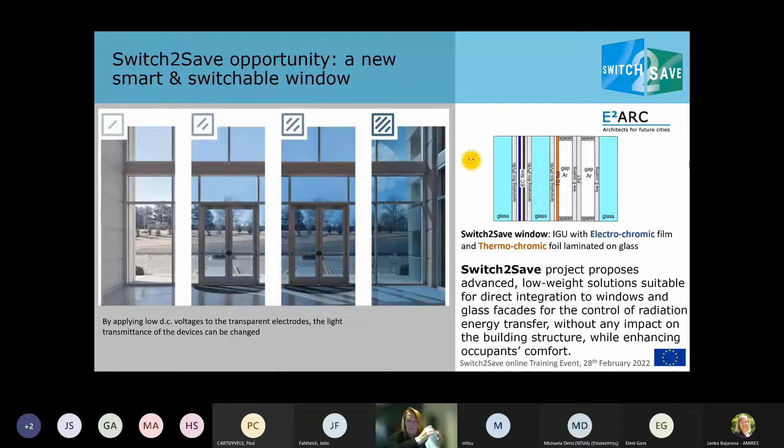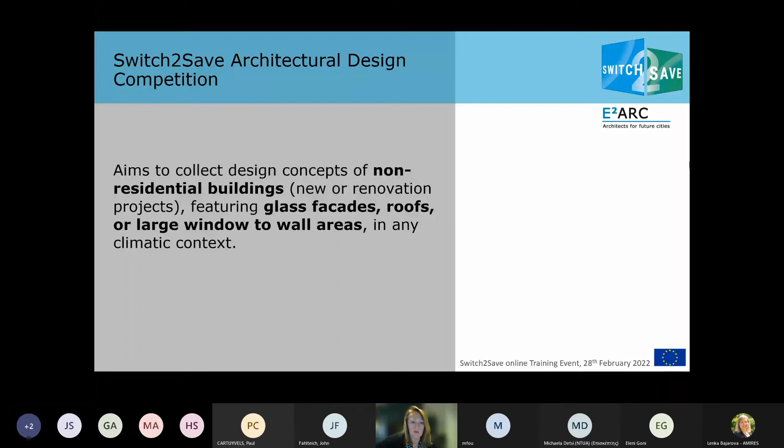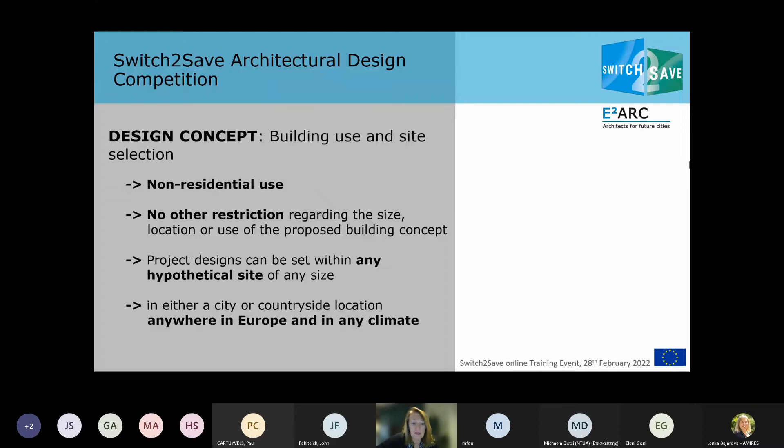Now we come to the Switch2Save design competition. This competition aims to collect design concepts of non-residential buildings featuring glass facades, roof, large windows to wall areas in any climatic context. What would we like to receive? A design concept. It doesn't have to be a building which is already built, just a concept. It has to be non-residential. There is no other restriction regarding size, location, or use of the building concept. It can be on any hypothetical site, any size, and it can be in the city, on the countryside, anywhere in Europe, in any climate.

The eligibility, who can participate in this competition? We really wanted to target students and young architects. Young architects up to 5 years of diploma, or else a team of architects, physicists, engineers led by an architect, and they have to be enrolled in an academic program, bachelor, master, etc. There is a limit of 3 members per team. The competition is open to all nationalities, but the team members should be based in Europe or one of the associated countries like Switzerland, Norway.

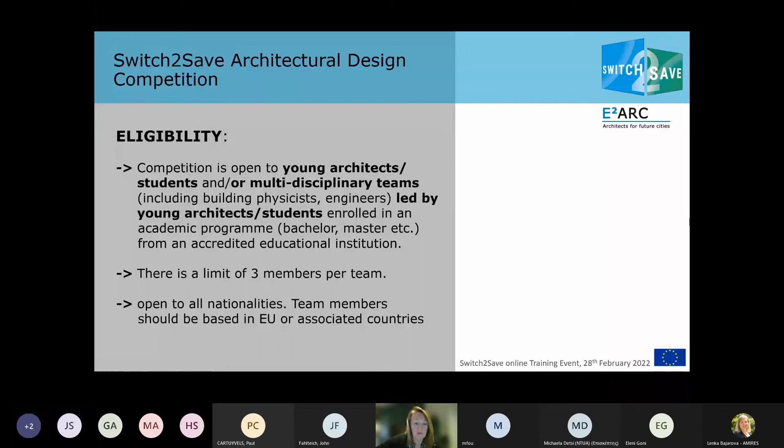We really target students and young architects because we know they are working in the master program on big projects which will be very contemporary with big glass parts, and we think that they will develop projects that will be fit to participate in this competition.

What are the evaluation criteria? We have 4. The design concept and the level of innovation. We will ask you to elaborate your design concept, think about drivers, possible barriers, other parameters like aesthetic integration, of course, leading to the proposed design as a response to the competition brief. We will ask you to elaborate your energy saving concept, to describe how your project addresses the need for energy efficiency in view, of course, of the European energy targets, and how the design maximizes the energy saving potential of the electrochromic and thermochromic glazing.

We also would like you to show the exploitation of the Switch2Save smart functionalities and to show the replicability of your concept, and also to tell us about the user comfort in the building you have designed.

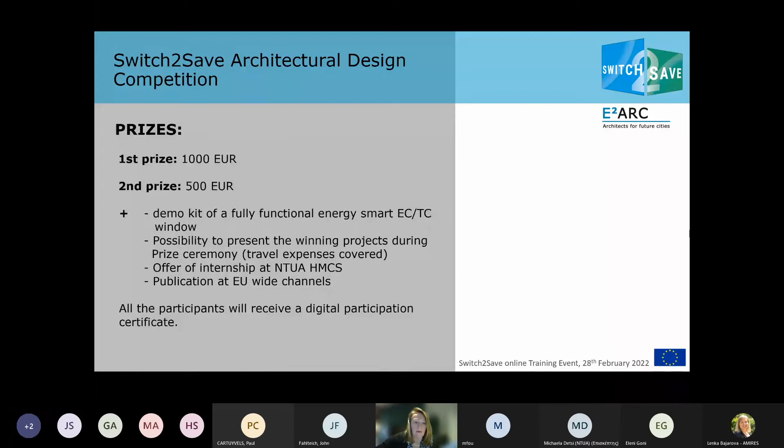So what to submit? We don't want to make it too complicated. We want to make it easy for you. We would ask one PDF file, maximum 30 megabytes, with a brief description following the submission brief template. We also would like one infographic, one big panel presenting the proposed design in response to the competition brief. And then, of course, you are also free to add other visual material, photos, plans, anything which illustrates your design. And you have to sign a declaration of authorship, of course.

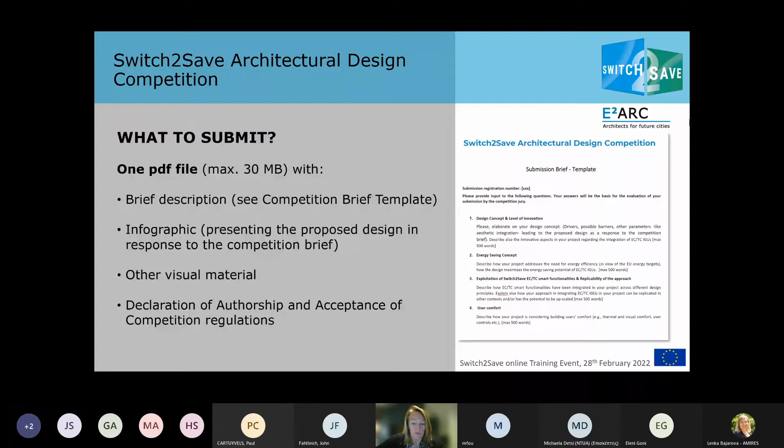How to submit? It will be easy. You will register through a link where on the website we will ask the name of the team leader, the several team members, and your status: if you are an architect, a young architect or a student. Young architects can be up to 5 years after the diploma. This is how we define this.

You will get confirmation of your registration by email, including information on a username and a login, and a link to the OwnCloud folder. Then comes the time that you submit your proposal to the OwnCloud, and you will get a confirmation again. And then finally in September, you will be informed on the final results.